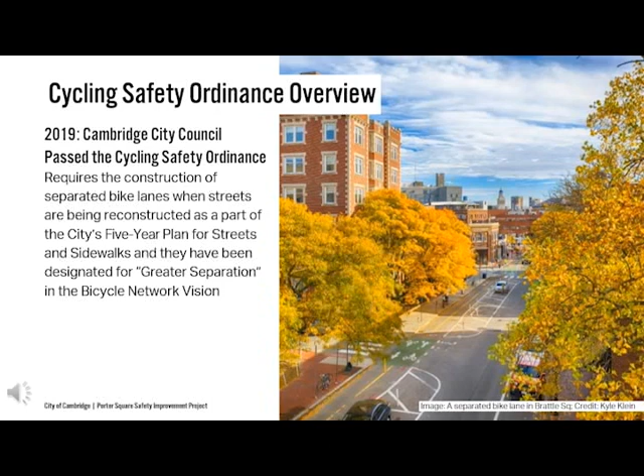Following the passage of the original ordinance in 2019, the City Council then amended the ordinance in October of 2020 to really try to further accelerate the implementation of separated bicycle lanes around Cambridge. And these amendments set ambitious requirements for installing approximately 25 miles of separated bike lanes within the next 5 to 7 years. The reason why the timeline is a little bit of a range is because there's different extensions that are possible through the ordinance, but basically by somewhere between 2026 and 2028.

The location of these facilities is informed by both the bicycle network vision that I mentioned earlier, but also very specific requirements that are laid out in the ordinance itself in terms of streets where we need to install separation both generally and within specific timeframes.

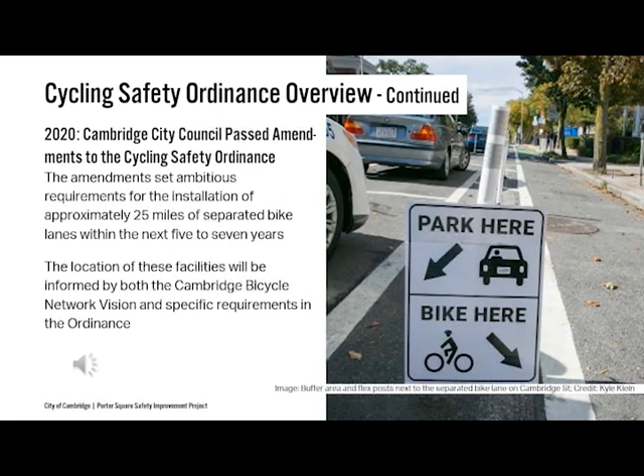This slide describes the locations or corridors where we are required to do separated bicycle lanes. So we have to install separated bicycle lanes along all of Massachusetts Avenue, and that includes the segment through Porter Square, which is what we're here to discuss tonight. But we also are required to do it along Broadway between Quincy Street and Hampshire Street, as well as on Cambridge Street from Oak Street, which is where the current project in Inman Square ends, all the way down to 2nd Street in East Cambridge.

On Hampshire Street from Amory Street to where it meets Broadway, and then on Garden Street roughly from Huron Avenue to the Cambridge Common. There's a little bit of nuance to that as described on the slide, but basically it's to connect from the Cambridge Common west to Huron Avenue. In addition to that, we have about another 11.6 miles of separated bicycle lanes that have to be installed in other locations based on the bicycle network vision plan. And those can be in other locations around the city to be determined by city staff in consultation with the community.

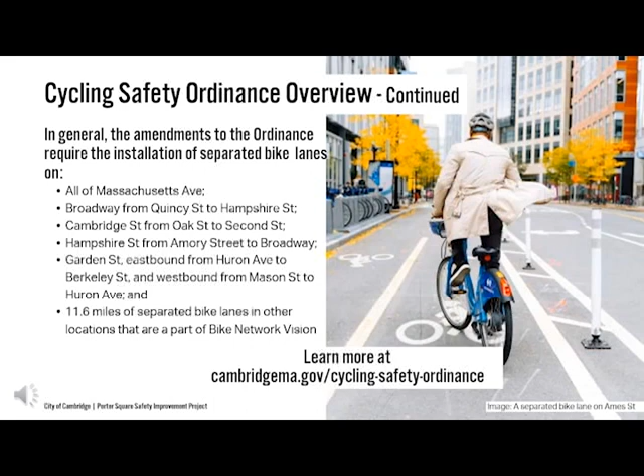On the left of this slide, you can see a list of projects that we've done in the past that included separated bicycle lanes, including other sections of Mass Ave, Cambridge Street on the western half of Cambridge Street, west of Inman Square, the sidewalk level cycle track or separated bicycle lanes on Western Avenue, Brattle Street near Harvard Square, as well as significant sections of Binney Street and Galileo Way in East Cambridge or in Kendall Square, and then many other locations around the city. You can start to see these in both large and small segments of the streets.

On the right, you can see a map of the bicycle network vision from the 2020 update to the city's bicycle plan, and the streets that are in purple on the map are the ones that are designated for greater separation. So as you can see, it's really trying to create a citywide network that spans most of the way across the city, so people can really connect from one end to the other or within it fairly easily,

within separated bicycle lanes and also within the yellow streets, which are sort of low speed, low volume bicycle priority streets where people should feel safe cycling regardless of whether there's bike lanes or not, but just based on low volumes and low speeds, they should be streets that are comfortable and safe for cyclists. And again, when you put this all together, you have a citywide network that allows people to travel all over Cambridge by bicycle in a safe manner that's accessible to pretty much everyone who's able to ride a bicycle.

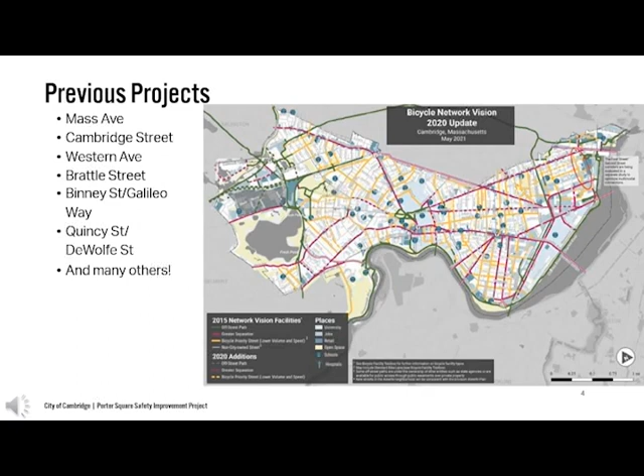It's also important for everyone to understand the reasons why we design our streets the way we do and what drives our street design, because we are trying to design streets that are usable by people of all ages and abilities. And that means that we're focusing and including people who don't necessarily have access to a car, don't have access to a car all the time, and creating safe and accessible facilities, including bike lanes, but also other types of facilities that can be used by a wide range of people, as it says at the top, of all ages and abilities.

When we think about vehicle congestion and delay, and this is maybe a little different than has been the case in the past or in other cities, we're not really trying to prioritize or eliminate delay for people who are driving alone in private vehicles. We're really focused on making the most efficient use of the space on our streets, focusing on moving people, not cars, or trucks. And as the slide says, moving people slowly is moving people safely. So it's not about speed. It's not about reducing delay necessarily. It's really about creating a multimodal network that can be used by a wide range of people.

There's existing plans and policies within the city that go back really 30 years. Not just the cycling safety ordinance. The city has had a vehicle trip reduction ordinance since 1992 that really focused on trying to promote sustainable transportation, like walking and biking and public transit. The different growth policy documents over the years have really focused on non-automobile mobility because we know that we can't solve our transportation problems with private vehicles and widening our streets or making it easier to drive.

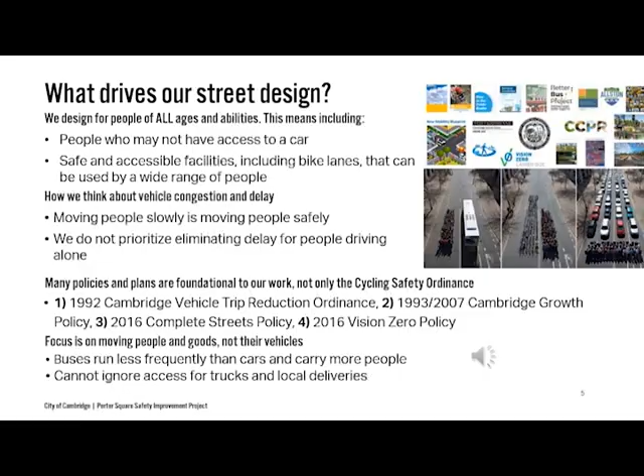So with that as introduction to the project and the sort of reasons behind it, I'm going to turn it over to Brooke McKenna again to speak a little bit more in detail about the project background and kind of what we're trying to accomplish. Thank you, Joe. Now we'll get into some specifics about this particular project.

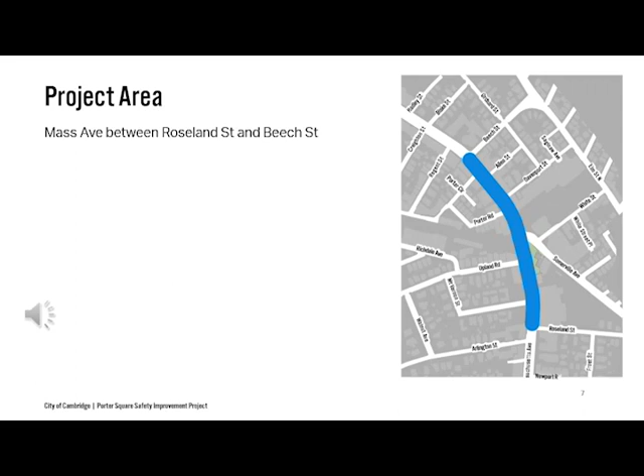As Joe mentioned, the entirety of Mass Ave is called out for separation in both the cycling safety ordinance and the bike plan's bike network vision. This particular section is Mass Ave from Roseland Street on the south to Beech Street on the north, encompassing the entirety of Porter Square. We have multiple goals for this project. First of all, we'll be providing safe, separated bicycle facilities that can be used by people of all ages and abilities. We'll meet the requirements of the cycling safety ordinance and align with the city's 2020 bike network vision, which called for separation along Mass Ave.

Importantly, this project will support the city's Vision Zero goals to eliminate fatal and serious injury crashes for all users. Vision Zero is a key component to all of the work that we do in Cambridge around traffic safety. And finally, we'll address as many issues as possible for all stakeholders, including businesses, residents, institutions, and our public safety departments, most specifically the fire department, ensuring that our work aligns with their very important safety mission.

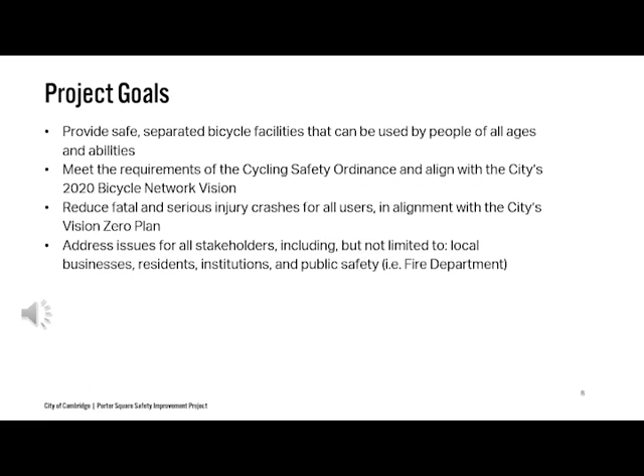It's important to take a moment and really dive into the benefits of separated bike lanes. Research shows that there are fewer crashes on corridors with separated bike lanes. Separated bike lanes also provide distance between parked cars and cyclists, eliminating the threat of dooring, which is really one of the most dangerous aspects of biking in the city next to parking.

The buffer in a separated bike lane also reduces conflicts between turning vehicles and people biking, because it provides some extra distance, and that means extra reaction time for the driver and the cyclist when that conflict does come up. Separated bike lanes also shorten the crossing distances for pedestrians where they're exposed to vehicular traffic.

It increases the level of comfort for people biking, and this really means more people from all ages and all abilities feel comfortable and are attracted to using these facilities. It also provides an increased level of comfort for drivers, because drivers know where to expect the cyclists, and that takes away some of the difficulties of navigating and sharing the road.

Separated lanes also enable more people to choose cycling as a transportation option. People who may want to cycle but not feel comfortable sharing the road with vehicles without the separation may opt to choose cycling once the separated lanes are available. And this in turn supports the city's climate goals.

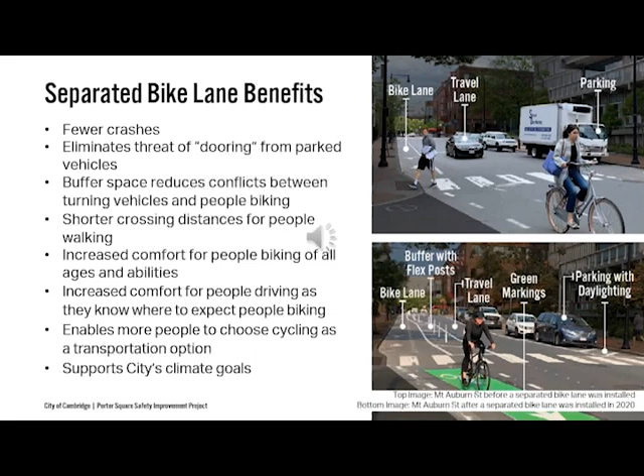This project will be installed by the end of April of this year. This reflects the timeline set up in the Cycling Safety Ordinance for a variety of segments of Mass Ave, including Roseland to Beech, which we're here talking about tonight.

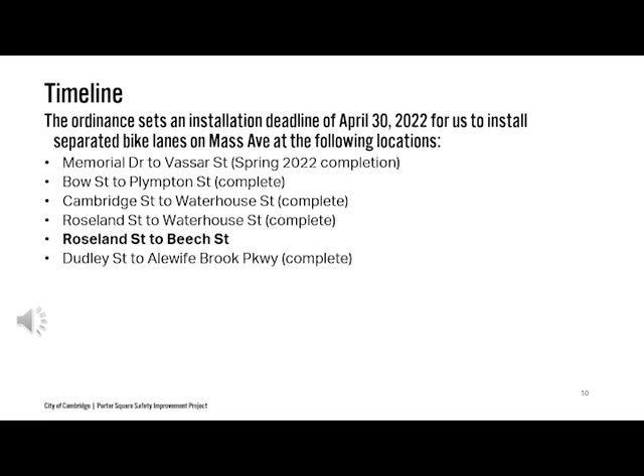Before we move on to talk in more detail about the proposed project tonight, I just wanted to circle back and talk a little bit about the safety improvements we were able to make at the main Porter Square intersection back in 2018. At that time, we were able to make some pretty significant safety improvements, primarily through traffic signal timing changes, as well as some limited physical changes.

We reduced the number of signal phases, which meant that all users of the intersection ended up waiting less for their turn. We also were able to improve the functionality of the jug handle for cyclists. If you look at the drawing on your right, you'll see the jug handle at the top of the screen, and this is a way that cyclists can make the left-hand turn onto Somerville Ave without having to mix with traffic and move over all the way to the left turn lane.

And through the timing changes, we were able to make it much faster for cyclists to choose that safer option. And that was a significant safety improvement there. We were also able to separate the right turning vehicles from the northbound Mass Ave onto Somerville Ave. We were able to separate those turning vehicles from cyclists and pedestrians so that they are not moving at the same time, eliminating that serious conflict.

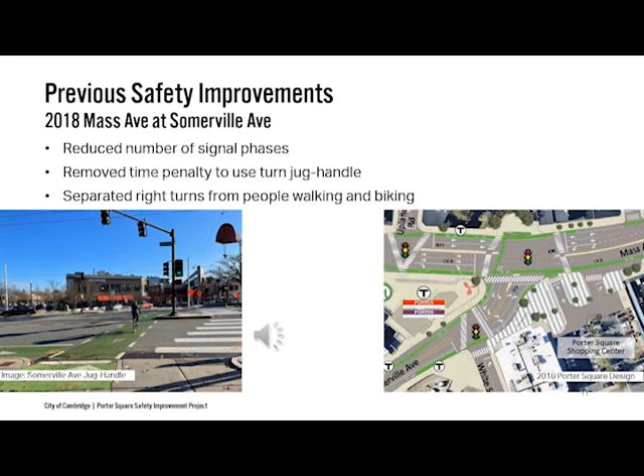We did want to circle back on those pretty significant traffic safety improvements we were able to make back in 2018. Next, we're going to transition into talking about the existing conditions in the project area. And for that, I will hand things over to Andreas Wolf, the project manager.

First of all, we want to go over the existing configuration of the road. So right now, as many of you are likely aware, on Mass Ave in this spot we have two travel lanes in either direction, painted bike lanes, so not separated bike lanes, but just the ones that are out there between parking and the travel lane.

There are overhead wires for the MBTA that are important to allow their trackless trolley buses to reach the garage they operate out of in North Cambridge. These wires also pose a number of constraints and certain challenges to construction and fire access, and so that's something we'll be going over later in the presentation.

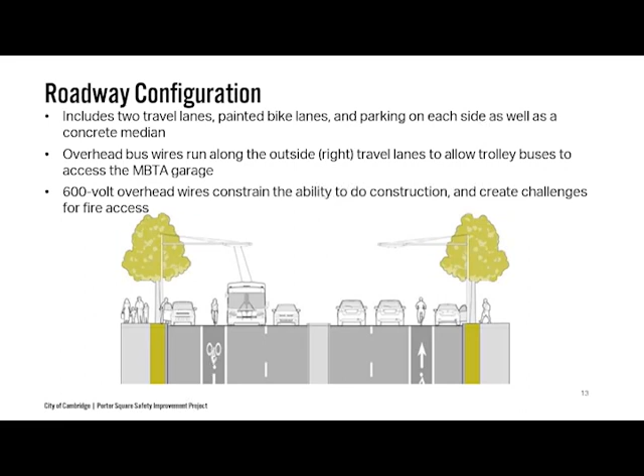Porter Square is also, as many of you know, a key transit hub. First of all, it's a station on the Red Line, but it also is a connection point to the commuter rail, and then there's three bus routes that come through Porter Square, and one of these is the 77, which is a key bus route. The MBTA has certain key bus routes which run at higher frequency, one of which is the 77.

So it's a major transit hub, and that was really shown in 2020. We did an assessment of how people get to the square, and that identified that 35% of shoppers in Porter Square arrived by bus or subway. So this is a key point in the transit network.

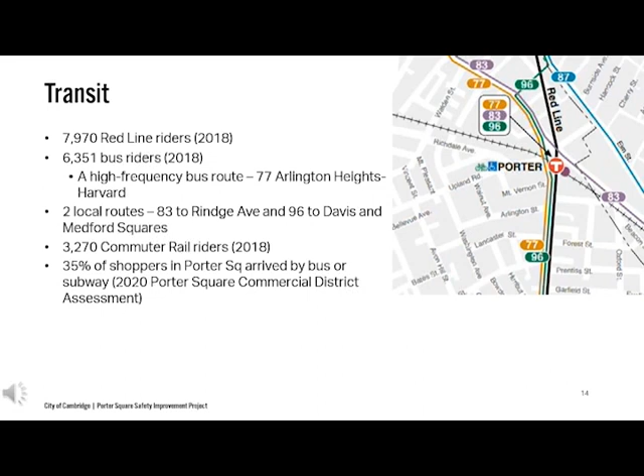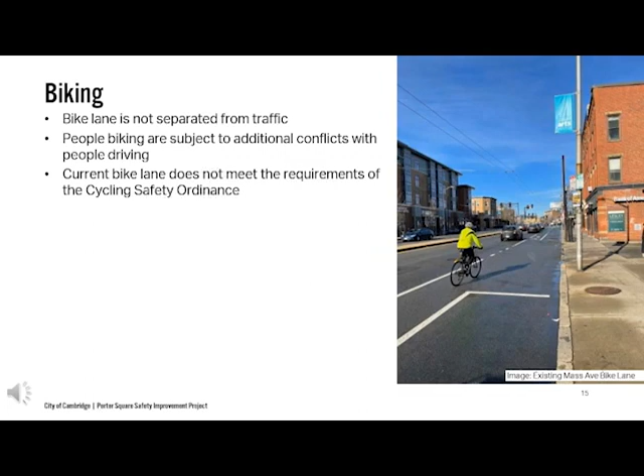The area sees a lot of usage by bicyclists despite not having safe facilities. The current bike lanes are not separated, as we've gone over. But despite this, it's a key connection point for bicyclists. The current bicycle lanes that are out there, as shown in the photo, don't meet the cycling safety ordinance and pose additional safety risks that we've gone over earlier in the presentation.

For example, there's accessible parking spaces, and we're committed as part of this to making sure that those spaces are retained, and hopefully we can actually add to the number of accessible parking spaces.

In addition, there's special use parking, so we have loading zones, valet zones, and a taxi zone. We acknowledge that any changes that might need to be made to those types of spaces really do involve additional outreach with the users of those spaces to make sure that their needs are met or accommodated in the future design.

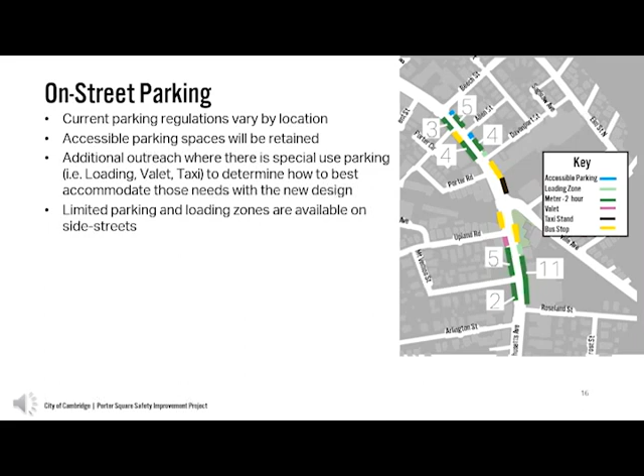There are some limited parking and loading zones on the side streets as well. It's not all resident parking on the side streets—it's really varied, but we've already done a lot of that, so there's limited opportunity to add parking on side streets. There's currently different spots of 2-hour parking with loading zones and a variety of different parking regulations on side streets.

So in the next few slides, we'll go over what it means to be a quick build project. That's a term some may have heard thrown around before in previous projects. This will explain quick build versus other types of projects the city does, and the considerations taken into account when we do quick build.

Quick build lets us do improvements to our streets more rapidly than a typical construction project. As part of quick build, we're limited more to pavement marking changes, flex posts—the white stanchions you might see around town—signage changes, and some limited changes to signal timing. For example, Brattle Street, shown in the photo here, is an example of a previous quick build project the city has done.

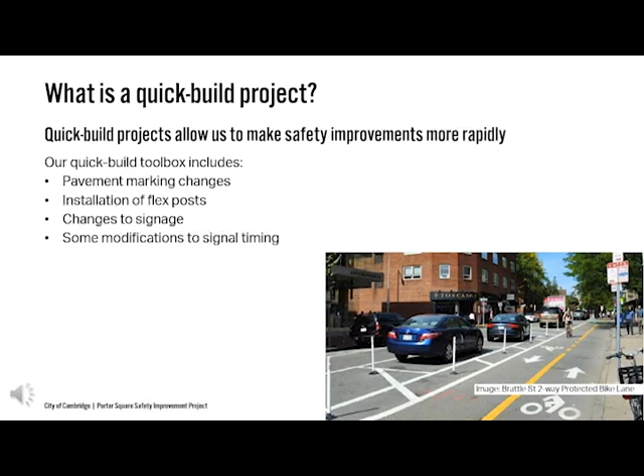What we can't do as part of quick build is a lot of the larger impact stuff. We cannot add crosswalks because you have to install a new curb ramp. So while we can freshen up existing crosswalks, it's not possible to install a new curb ramp. We're also not touching the utilities, so as part of making it quicker, that also means we can't do some of the construction elements that involve any sort of digging or curb removal either.

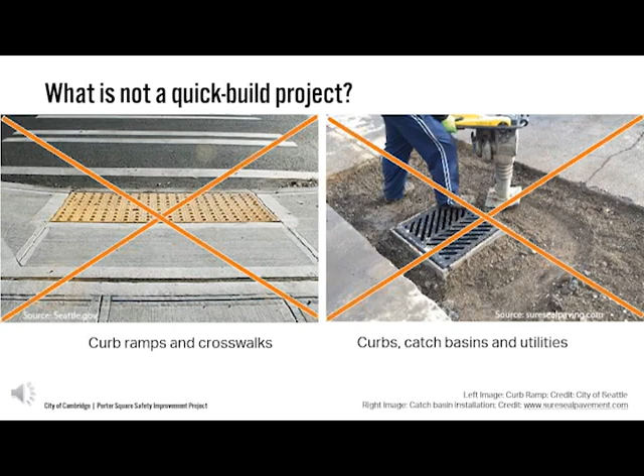The city does do larger construction projects at times. We have a very robust 5-year sidewalk and street reconstruction plan. All of these projects are programmed into that 5-year plan. This is really important—it lets us coordinate with utility companies so that they have notice, meaning we're minimizing the amount of times we're having to dig up the street, rather than having to come back again because a utility was missed. It's all done at once in one project. By programming it into the 5-year plan, we can best leverage our funding sources.

We do these projects throughout the city, but the one we're talking about today is not part of the 5-year plan. The primary reason for that is, per the ordinance, this project has to be installed by April of 2022. Putting it into our 5-year plan would substantially delay and push the project out into the future—it's not something that lets us meet the ordinance timeline and provide the benefits as quickly.

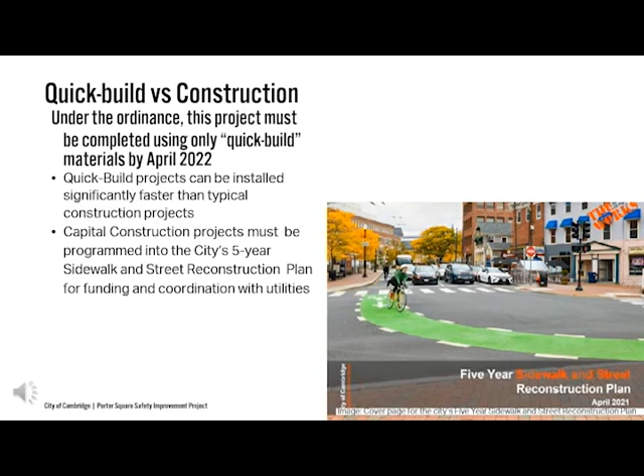Another key design consideration during this project has been working closely with the fire department to make sure we're not doing anything that impedes their operations. Already, we know that this section of Mass Ave is really tough for the fire department to respond to emergencies in, as shown in the photo on the right. Because of the overhead wires and other factors, they have to position their ladder trucks all the way over on the far right next to the parking in order to get underneath those wires. That lets them reach the upper floors of buildings and put out fires that might be on the roof. That applies anywhere on the corridor to any of the buildings, and it's something really important that we maintain, which we consider a lot in design.

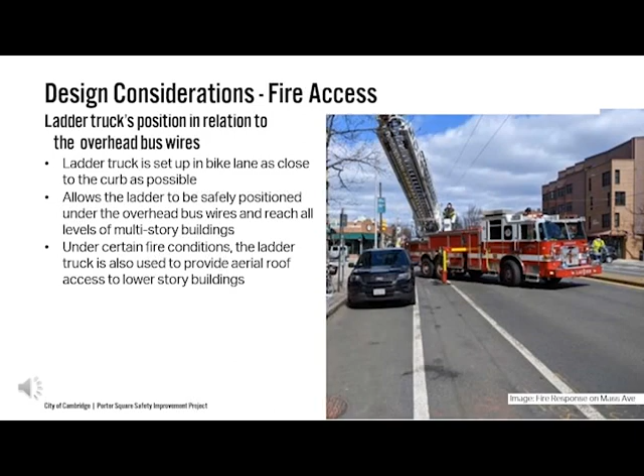The wires have high voltage, and any kind of contact with the wires could be fatal, so that's something we're really paying close attention to. The wires are used right now for the MBTA. While the 77, for example, doesn't run on the wires, they still need them because they're the connection between the car house in North Cambridge and the other lines that do. Any changes to the wires are really at the MBTA's discretion, as the current vehicles they use need those wires.

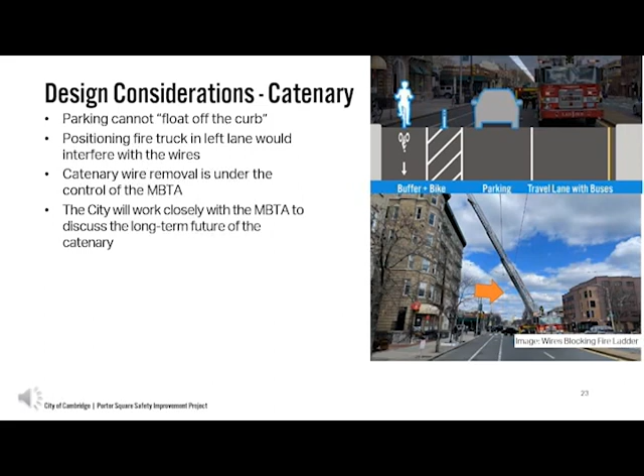Another major consideration was the median. The median causes a number of things. One is that in a lot of separated bike lane projects, we often shift lanes around. For example, on Cambridge Street, when we installed separated bike lanes a few years ago, the center line actually moved over - you'd have parking, and the parking might flip to the other side, so the middle of the road is shifting over. We cannot change that on Mass Ave here. We cannot change the location of the center of the road - it's a fixed object. Changes to the median would not make the project quick build because they would involve construction.

In addition, the median also has important issues that come up with fire access. It reduces the width of the street to below the optimal width for them to deploy their truck. While it varies by location, their truck may need 15 to 16 feet to properly deploy stabilizers on either side. One travel lane is 11 to 12 feet, so that's narrower. We need to keep that in mind too, that we have enough space between the two curbs - in this case the median and the sidewalk - to properly enable a response to a fire as well.

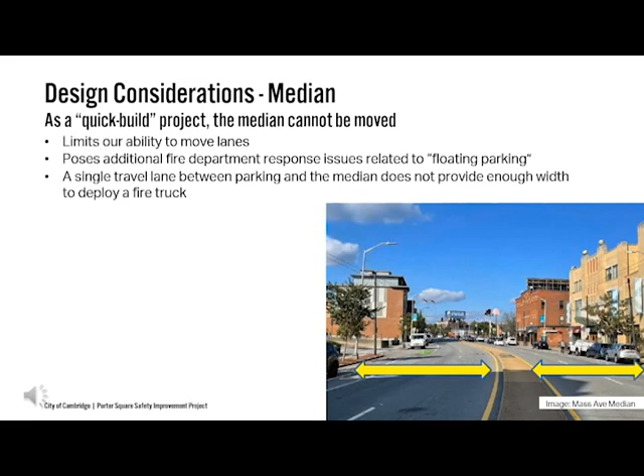We'll begin to discuss the different intersections along the stretch of Mass Ave and what specifically are some key considerations at each location.

First off, Mass Ave at Beach. At Beach, we're looking at the northbound area here. There's a large number of vehicles making the right onto Beach Street. This creates a conflict between people turning right and people walking and biking. There's also a substantial amount of delay currently from this intersection for all users, including transit riders. We also have a variety of bus routes here - buses that continue straight, like the 77 and the 83, but also a bus that takes a right. That'll be an important consideration later on.

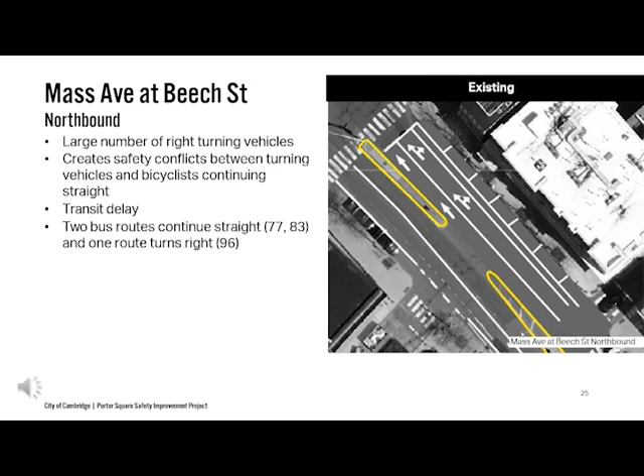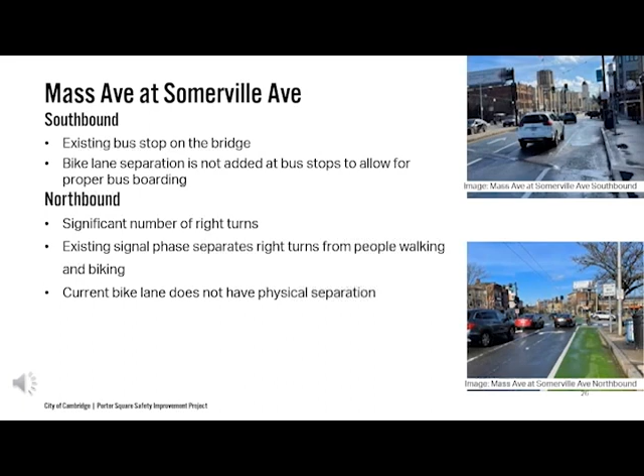Continuing on this section between Somerville Ave and Upland Road, southbound we're not putting in separation because there's an existing bus stop. In the northbound direction, the bike lane currently is too narrow for us to add separation.

A major issue is that we can't maintain the lane if it's under a certain width, about 7 feet, and right now it's about 5.5 to 6 feet. That means we cannot street clean at that location, and we can't plow it, so we don't want to add separation to the existing lane.

At the same time, if we were to add separation, we'd have to widen it, but we don't have the ability to widen that lane in that section without removing one of the travel lanes. No matter which way we did it, removing a travel lane would have a really negative impact on transit, in addition to all vehicles, but transit is something we're acutely aware of. We don't want to add delay as part of a project, especially to transit.

We also made a number of safety improvements here in 2018, such as that phased signal separation we discussed. This is also a state facility—the bridge itself is owned by MassDOT, and state facilities are not part of the cycling safety ordinance, which is another factor. So given all that, we don't really think modifications for this short section are advisable right now.

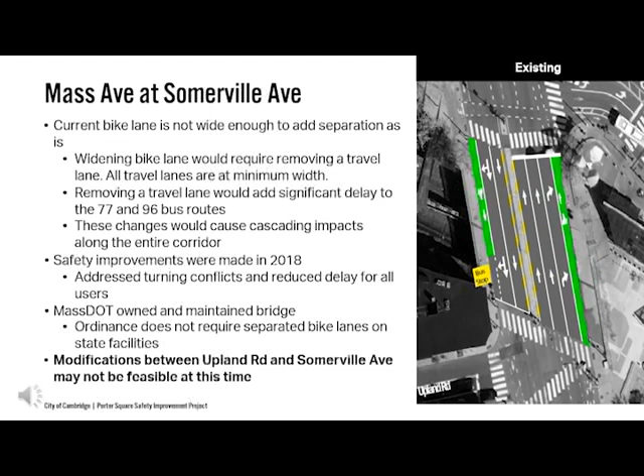Next up, we're going to show different possible configurations we might be able to do for the rest of the roadway. We're still very early in this process—we don't have a design or plans yet, but we do have some preliminary ideas, and we want to share that information.

The next few slides contain a good amount of information. We're going to share different possible layouts for the street, talk about the intersections and different things we can do at the side streets, and discuss some alternatives we looked at but for various reasons weren't feasible. For all of those, we'll discuss the benefits and provide a brief summary.

Some things to consider as you're looking through this information: does this idea meet your needs, or how can it be improved to do so?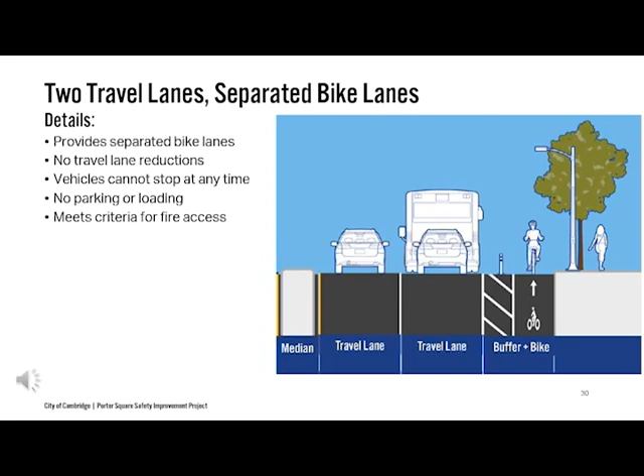Benefits to this kind of layout: this causes no additional vehicular delay. You still have 2 travel lanes. It also, importantly, creates the least amount of delay for all vehicles, including buses. This has the least amount of impact on bus service overall, compared with the other option we'll share.

Some drawbacks: as stated, this involves the complete removal of at least 2-hour metered parking. The only parking we'd be able to keep is accessible parking, and potentially loading zones—we'll have more on that in the second slide.

This option doesn't do anything to improve transit, but it does have the least amount of impact.

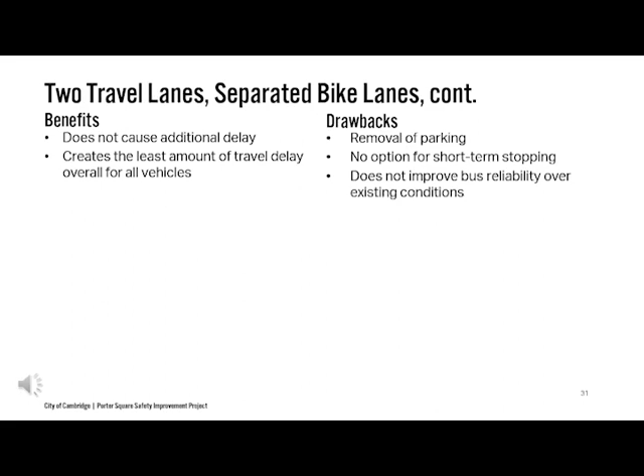The next option is similar, except in the right lane we have a loading zone—a bus lane that can be a loading zone during certain times of the day. Not at the same time, but during certain hours: during rush hour it's a bus lane, and midday it becomes a loading zone. We haven't determined just what hours yet; it's in the early stages of planning an idea.

The loading zone hours would be treated as a standard loading zone in the city, which means 15-minute parking for anyone, and 30 minutes for commercial vehicles.

While this does add some obstruction for the fire department, it meets their criteria because in the case of an emergency, drivers are able to get back in their vehicle and quickly get out of the way. They're close by because it's short-term parking, unlike 2-hour parking where they could be off and you could have a major issue. So this also meets the fire department criteria.

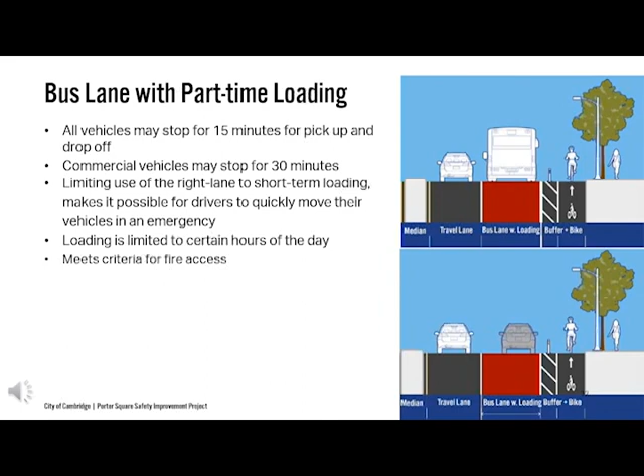The key benefit to this option versus the other is that it at least provides people driving a chance to stop their vehicle for pick up and drop off.

But there are some drawbacks to this option. The first option we shared overall had the least amount of impact on transit. So this option, while providing a bus lane during certain hours, during the hours that the bus lane is being used for loading, you would actually see a reduction in service and reliability for transit. This one creates more delay for buses than the first option.

This also creates more vehicular delay than the first option because you're going down to a single lane for traffic. And it also results in the removal of 2-hour parking.

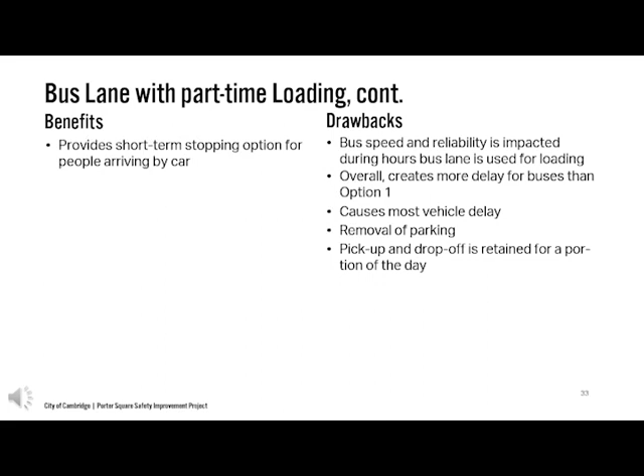We would still be able to have loading in this option, and we'd also be able to have accessible parking, but metered parking would be removed.

The final design we end up choosing could mix these two options. We don't have to do the same cross-section everywhere. One block or direction might have one option, another section might have the second option. So it's location by location, and that'll depend on what we hear from the public, as well as the unique physical constraints at each location.

But as a baseline, we wanted to provide this table that summarizes the two. In terms of biking, both options provide separated bike lanes, and the separation is the same, so they both improve cyclist safety and comfort.

In terms of bus impacts, with the first option of 2 travel lanes, travel time and reliability is really just unaffected by the project during all hours. So that has the least impact.

And with the second option, you're actually improving reliability potentially during certain hours, but in other hours when there's loading, because the road is going down to 1 lane and buses are using that lane of mixed traffic, you're actually impacting transit, and that creates a negative impact on transit.

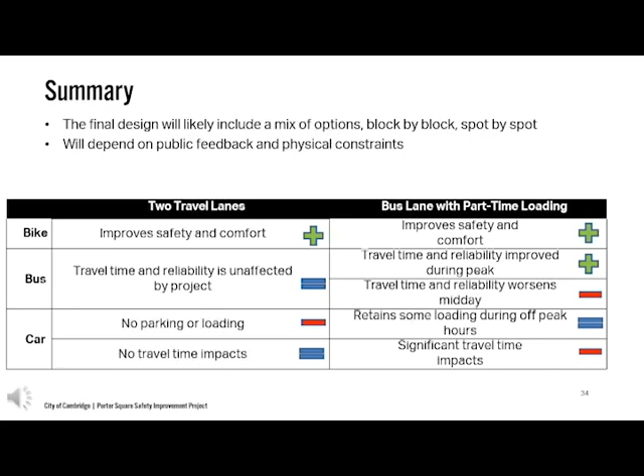For driving, the first option we provide has no parking or loading, but it has no impacts on travel times and delay. The second option retains some loading, but it has significant travel time impacts because you're going down to one lane.

Next, we'll go over some additional ideas that, for a variety of reasons, don't meet our criteria, but we'll go over what they were and explain the reasoning behind that.

The first one was the idea of having non-separated bike lanes, kind of like what is out there right now. This keeps parking up against the curb, and there would be the option to have a bus lane still in one of the travel lanes, but this does not provide separated bike lanes. This does not meet our project goals, does not provide safe, separated facilities, and importantly, doesn't meet the requirements of the cycling safety ordinance. So this is an option that we did not pursue.

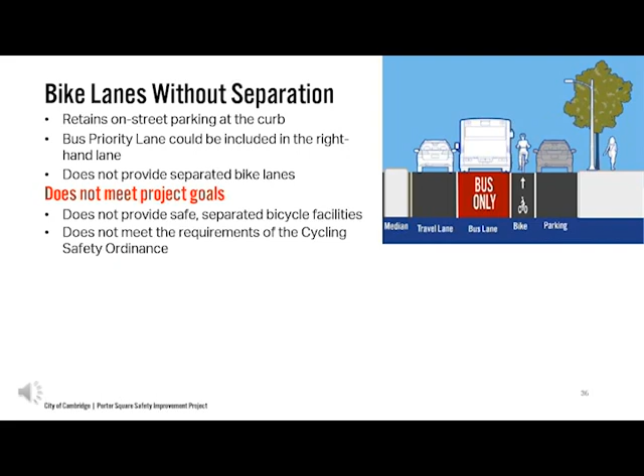The next option that we ruled out was the idea of having parking to the left of the bike lane. This provides separated bike lanes, similarly to the other options, but the right-hand travel lane essentially becomes parking, and this reduces Mass Ave to one lane for all traffic. So there's a number of reasons we did not pursue this.

As stated before, the overhead wires, by putting parking floating out there, puts the fire truck in the wrong position to respond to an emergency. Also, because of the median and the width constraints, that creates issues for deploying a fire truck. And one lane creates significant amounts of delay for all vehicles, including transit, which is something we're really concerned about.

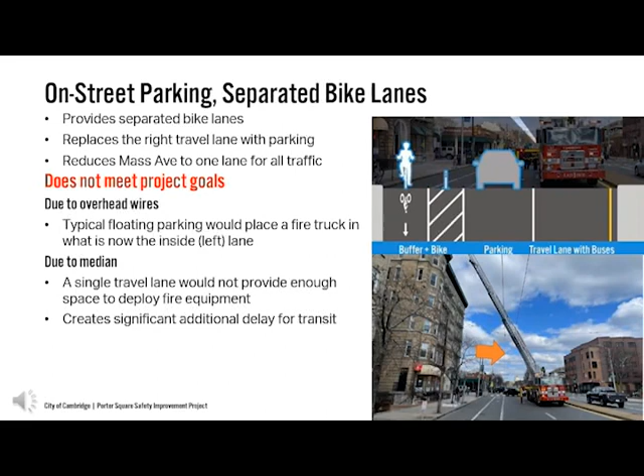Another idea we ruled out, but one we hear about from people, was putting the bike lane on the left side, or having it run down the middle of the street. By doing this, you shift the bike lane over, which allows people to park at the curb. This also reduces the road down to one lane for through traffic.

But this doesn't meet our project goals for a number of reasons. This introduces bicycling to an unexpected location, creating a lot of conflicts for vehicles making turns and coming into interaction with a bicyclist in a place where it's not expected. In addition, because we're looking at a very short project, you would be making people biking make a somewhat uncomfortable movement across the street and then back over again.

We also considered what this means for operations of the street—it would involve a significant amount of signal work to make happen, which would be very challenging. In addition to all that, this creates a substantial amount of delay by going down to one lane. For a number of reasons, this is not an option we pursued, but the primary one being that it just didn't meet the goals of the project of providing a safe facility.

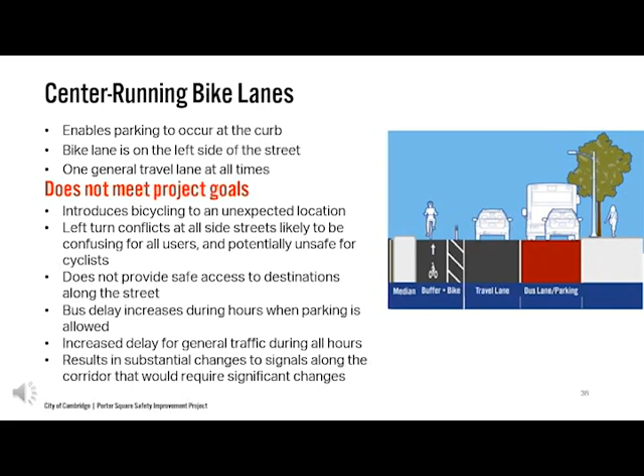Next we'll talk about the different intersections, starting with Mass Ave at Beech Street. So we have the first option here. As stated before, we have a high amount of traffic making a right turn, including a bus route.

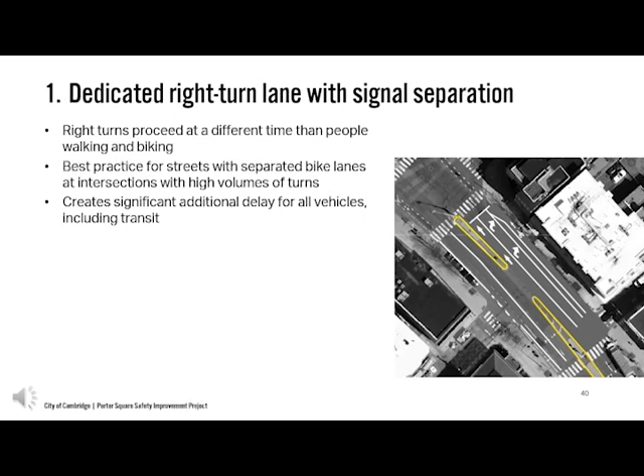General best practice when you have that situation and you have separated bike lanes is to have those two going at separate times. So you would have a right turn signal and then a red light, and then a green for the bicyclists, and then it would switch so that the right turns are going and the bikes are being held. This improves safety by reducing the chance of conflict between a bicyclist and turning vehicles, but it also creates additional delay for all vehicles, including transit, because instead of being able to go straight from both lanes, now traffic is only going straight from the left lane.

The second option would be essentially the signal and the lanes functioning as they do right now, where the right lane is—you can go straight or turn right. This improves throughput of vehicles, causing less delay to the bus than the first option, in addition to causing less delay to everyone else. But this doesn't provide the time separation between the right turns and people biking and people walking.

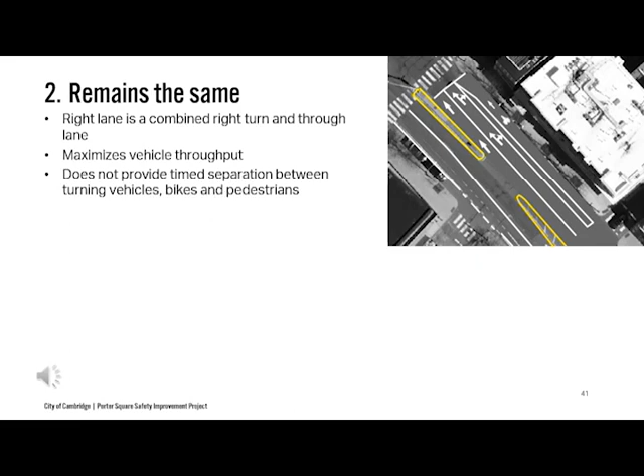So to summarize, the first option, the dedicated right turn lane, provides improved safety and comfort for people walking and biking, but increases delay for all vehicles, including buses. And then the second option, where it remains the same, creates less vehicular delay. Buses can use both lanes. But it does not improve safety, and it also doesn't improve bus reliability. It just results in less impact.

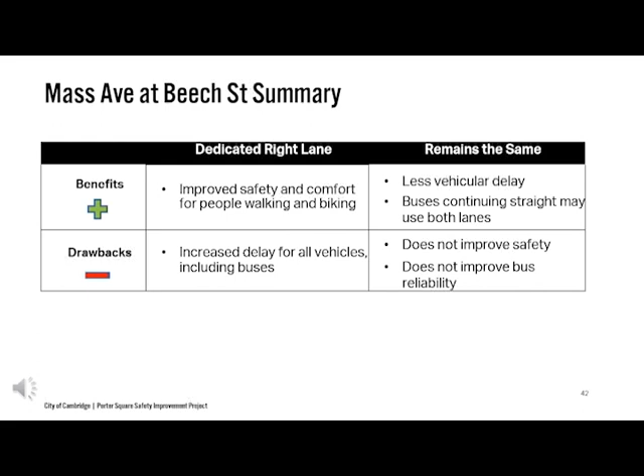Next, we'll talk about Mass Ave at Upland Road. So we have a few options here, which we'll go over in the next few slides. So currently, Upland Road is a two-way street. We could make it one-way going towards Mass Ave. This has a number of benefits. For example, this allows us to add parking on Upland Road because you're removing one of those travel lanes. That creates more width.

This also addresses safety issues. It eliminates the left turn into Upland Road from Mass Ave, which, just in general, when you remove a left turn movement like that, results in safer operations. It also helps mitigate the delay on Mass Ave. So, if we were to remove a travel lane on Upland Road, it reduces the number of phases in that signal and actually helps move traffic a little better and helps offset some of those impacts.

The flip side to all this is that this reduces access to Upland Road, and so if you were trying to get into Upland Road from Mass Ave, you'd have to find an alternative route by going north or south to, say, Walden Street or Linnaean Street, and making your way back into Upland Road.

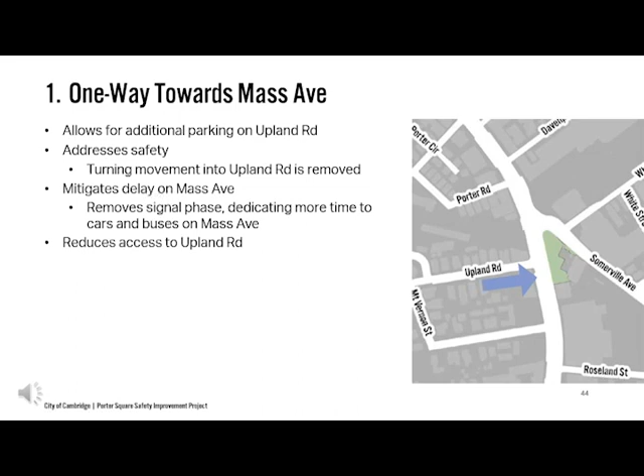So the next option would be to have Upland Road run one way away from Mass Ave, so you could only turn into it. This, the same as the first option, allows for additional parking. It mitigates delay because you're still removing one of the signal phases. But it doesn't do as good of a job of addressing safety because you still have people making the turn into Upland Road. It also, just like option one, would reduce access. It just would have it flipped around. So if you were trying to come out of Upland Road, you would have to go around onto one of the other streets.

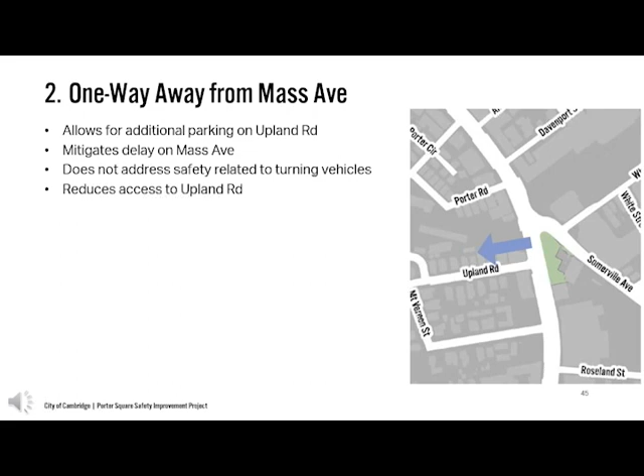And the last option for Upland Road is that we keep it the same. We don't make changes. So, we wouldn't be able to add new parking there. This also doesn't help offset the delay on Mass Ave or address safety, but it does retain the existing configuration and allows for access to Upland Road from both directions.

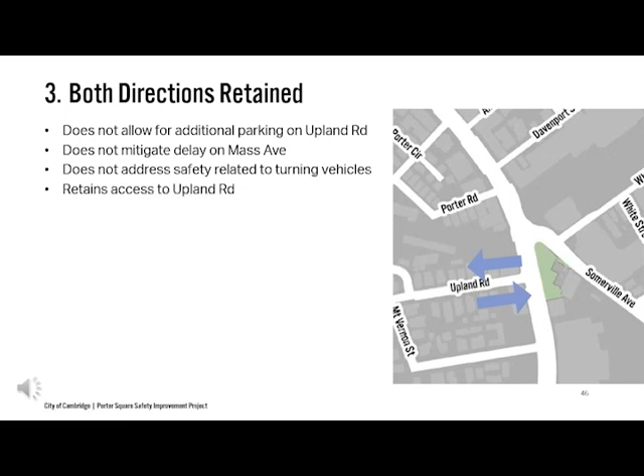Next, we just have a summary of this. So you've got the first option, one way towards Mass Ave, which addresses delay, adds parking, addresses safety, but reduces access. And then one way away from Mass Ave addresses delay and adds parking, but does not address safety and reduces access. And then keeping it as is retains the existing access, but you don't get any of the benefits that we had discussed.

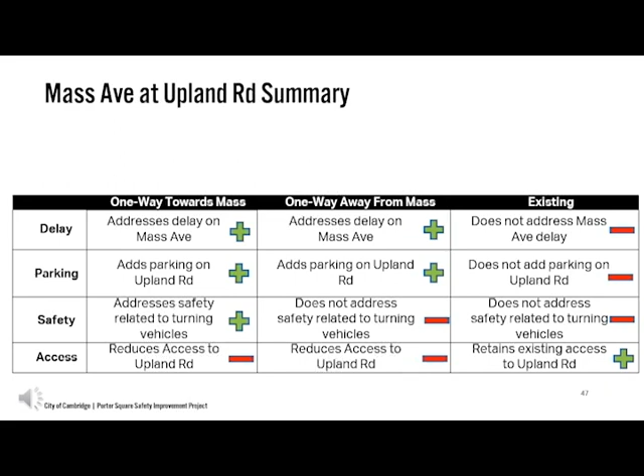So next steps going forward, we're still very early on in this process, but as we stated, this project will be in April, as stated by the ordinance. We have the April 30th deadline. So first of all, we're going to be absorbing and collecting your feedback over the coming months. We intend to host a second community meeting sometime later in the winter. By that point, we'll have heard a lot from you, and we'll have a more refined design to share.

We're also going to be conducting targeted outreach for businesses to hear specifics and have those one-on-one conversations. And as we talked about earlier, we're putting together a survey, and that just provides people with another chance to provide their input and have more time to write something up and review these options and ideas that we had discussed today in a more detailed way. And so we're going to provide some details on how to access that survey.